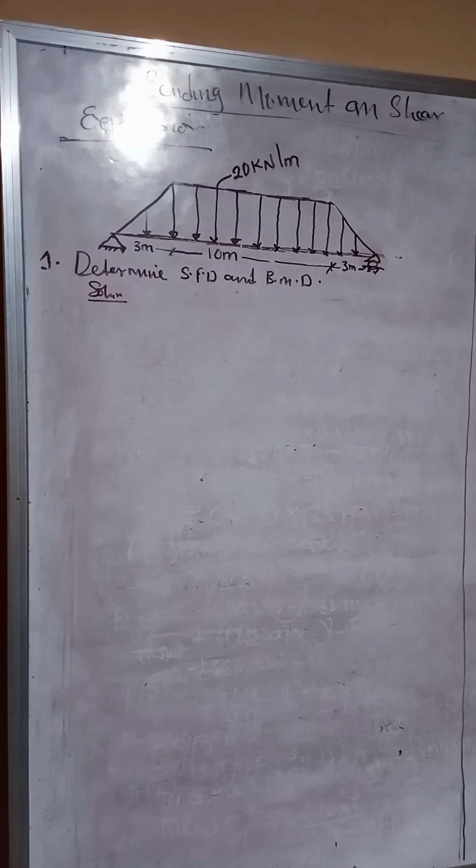The first thing we are going to do is obtain the reactions. When we draw it, we are going to have the bending moment, the free body diagram of this particular beam as this. Let's call here RA, let's call here RB.

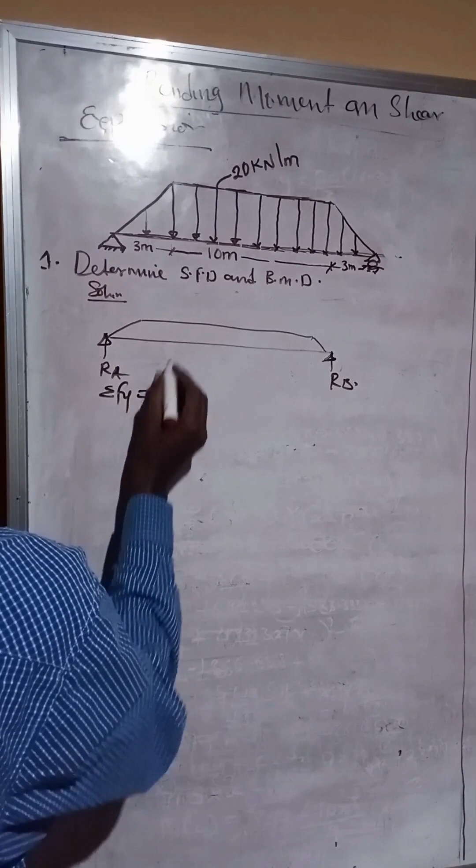Now if we calculate this, if you look at the shape, it is a trapezoidal shape. So you can say sigma Fy is equal to the area of the trapezium, and the area of the trapezium is half.

Calculate the length. Here is 10, here the entire length is 16. So it's going to be A plus B times height. A is 10, B is 16, times the height which is the intensity of the load, which is 20.

So if we do that, we're going to have that our sigma Fy is equal to... all right, so we are going to be working on this. Now if we draw this, this is the free body diagram of this expression. Here is 3, here is 3.

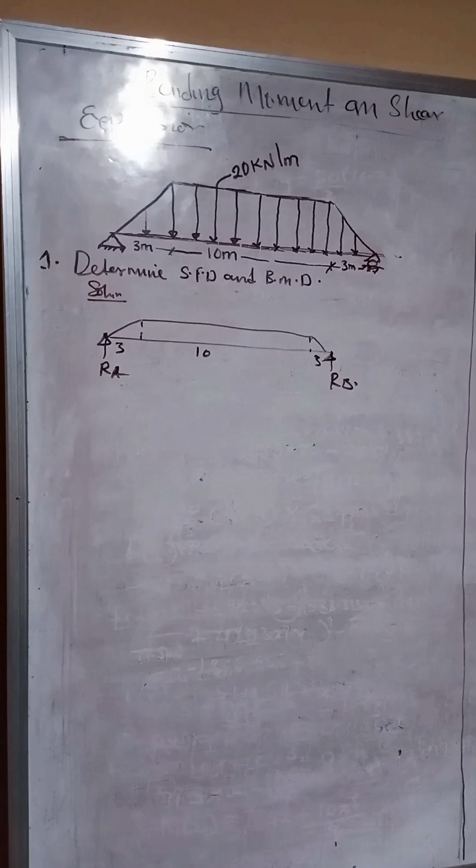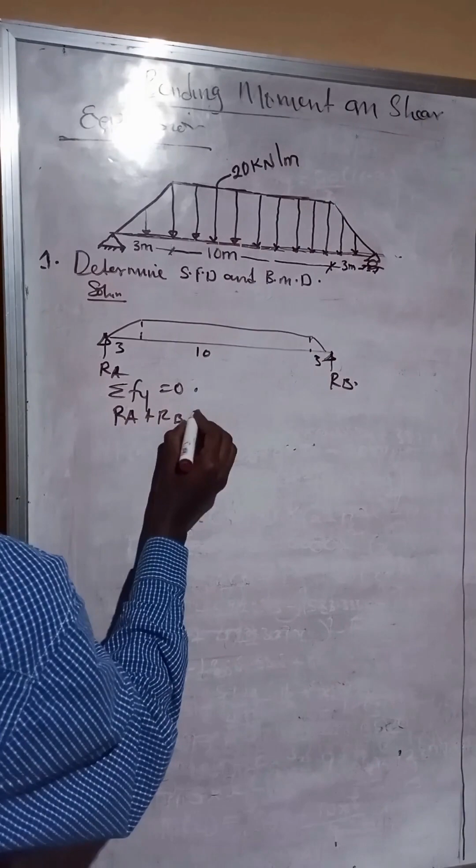This gives us 26, so this becomes 260 kilonewton. All right, so that is the total vertical reaction.

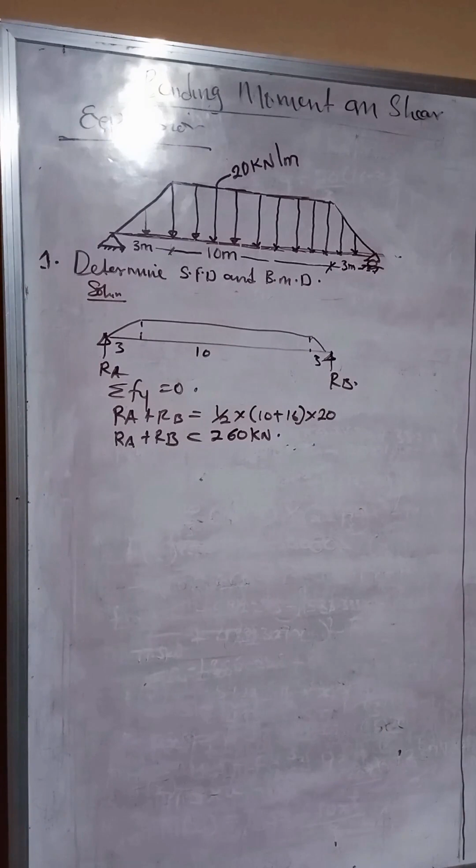Now the next thing we are going to check is looking at the beam. You can see it is symmetrically loaded on the simply supported beam, so what it means is the reactions will be the same. If we divide this beam into two equal parts, we're going to have the same reaction here and here. So Ra and Rb are going to be the same, meaning Ra is equal to Rb.

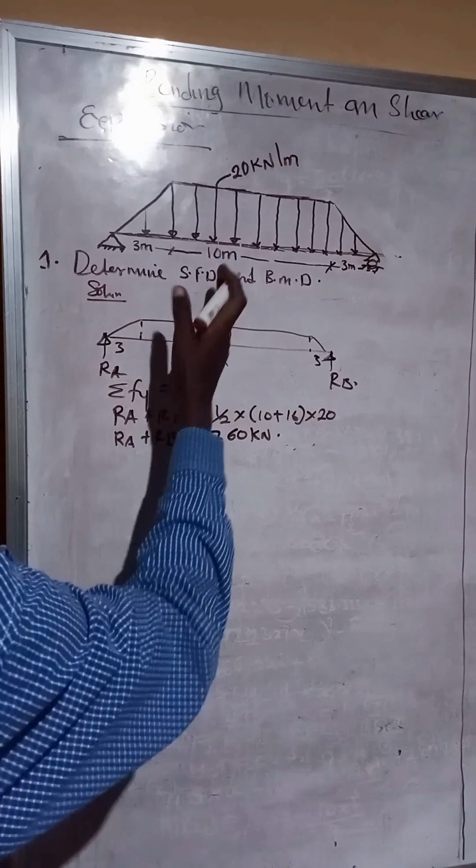So if we divide it into two, the reaction Ra and Rb will be of the same value, because of the symmetrical arrangement of the load. So we have 2 Ra, when Rb becomes Ra, becomes 260 kilonewton. All right, so we can have our Ra now to be 130 kilonewton.

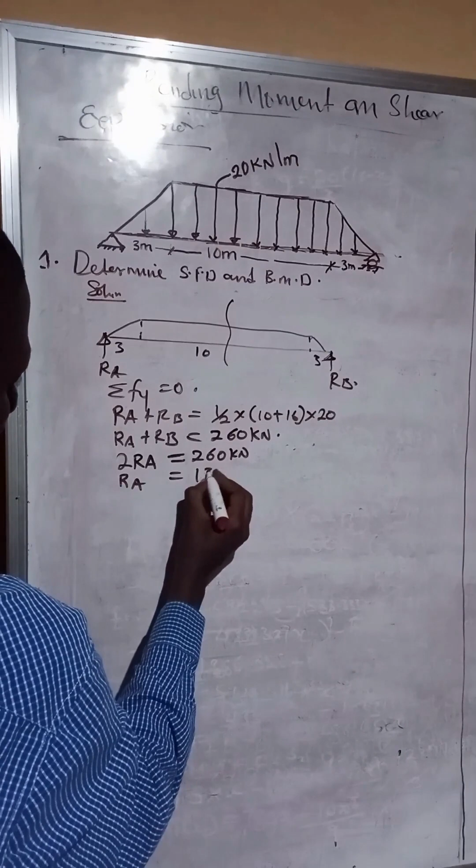Okay, so having gotten Ra, the next thing we need to do is obtain the moment expression and shear force expression for each of the load zones. Now if you look at the board, we have three basic load zones. We have the first load zone, which is a triangle, the second load zone, which is a rectangle, and the third load zone, which is a triangle also.

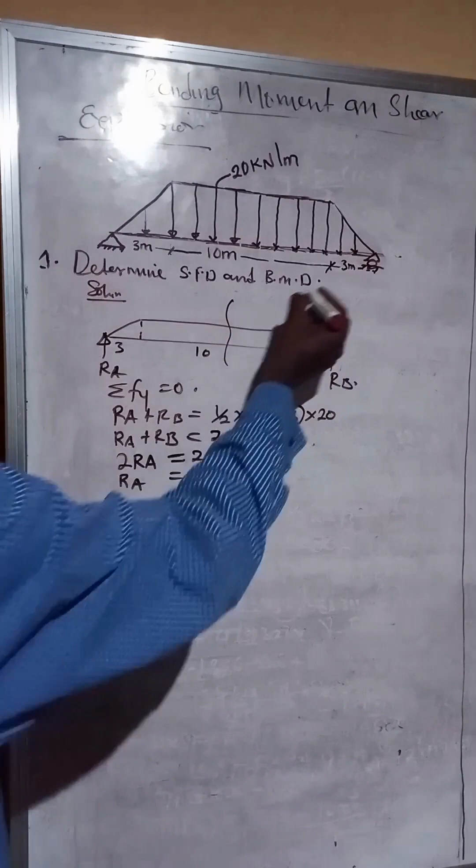So quickly, we are going to get the load zones for each of these particular loads. Now let's start by taking the first load zone. Remember, we intend to determine the shear force and bending moment diagram, and also we'll obtain the maximum bending moment for this particular beam.

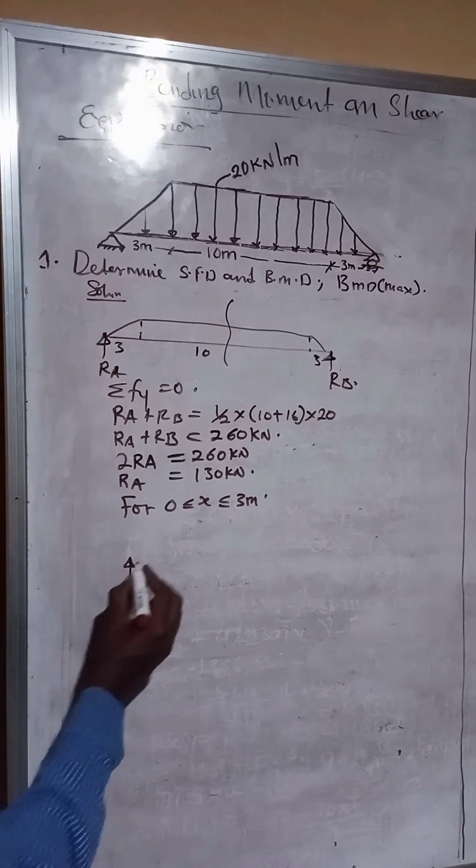Okay, so now let's start from the first load. So let's say for 0 lesser than x, and x lesser than 3, that is the first load zone we're going to consider. Now what we have as a shear force expression, remember how we used to do it? If you look at the previous videos, you have a good understanding of what we did when taking the moment expression.

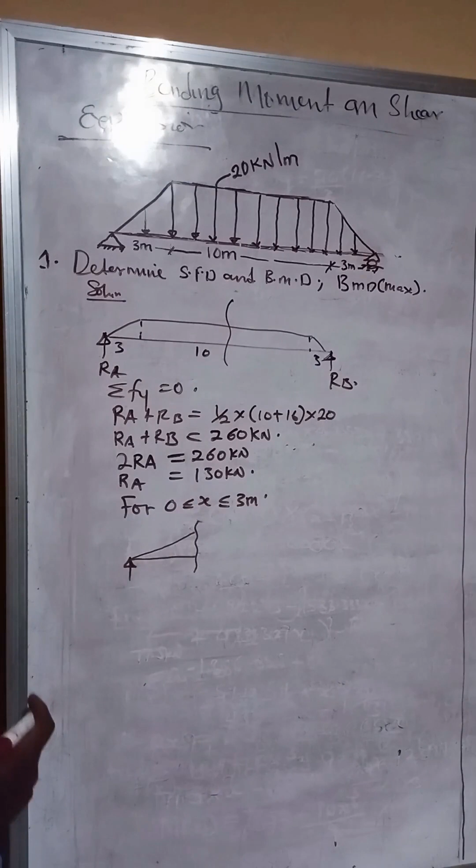Now we're cutting between this particular range. Just cut between the range. Let's call the section we are cutting 1, 1, 1. You can call it whatever you wish.

Now, when you cut through, you are going to have a vertical reaction, which is our shear, and you are going to have a moment which is anti-clockwise. That will be the internal moment, which is also a function of x. Now, this is x, value for x to this point.

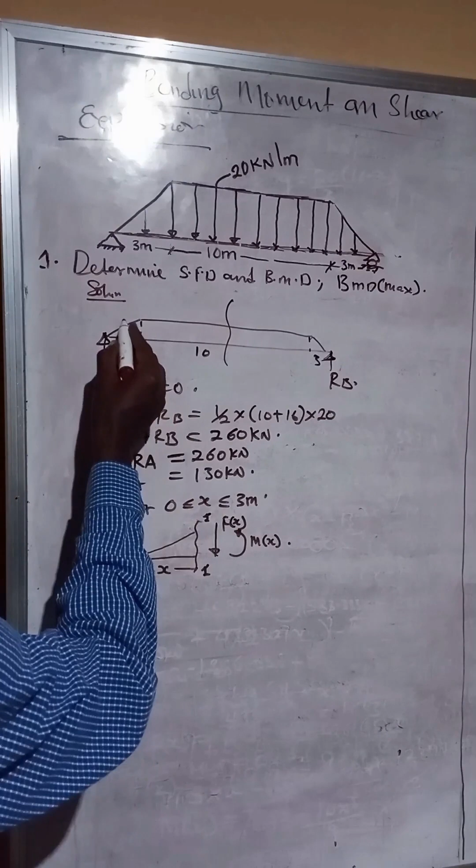So this is the first thing we are going to see. Now, apart from this, remember that we are cut between this particular load zone, and this is a triangle. Remember, when you cut between it, you are going to have... let's make a sketch of it. Let's assume we are cutting somewhere here. You have this, it goes in this direction. So if you complete it, let's assume that this is a 1, 1. So here is 20. Okay, now we've cut between it, and this is what we have.

We've already called here our x. So now we have a problem: we need to obtain the intensity at this point. If you look at it, the intensity increases as it goes to 20, so there's a particular load intensity at this point. Let's get it - we quickly use the similar triangle properties.

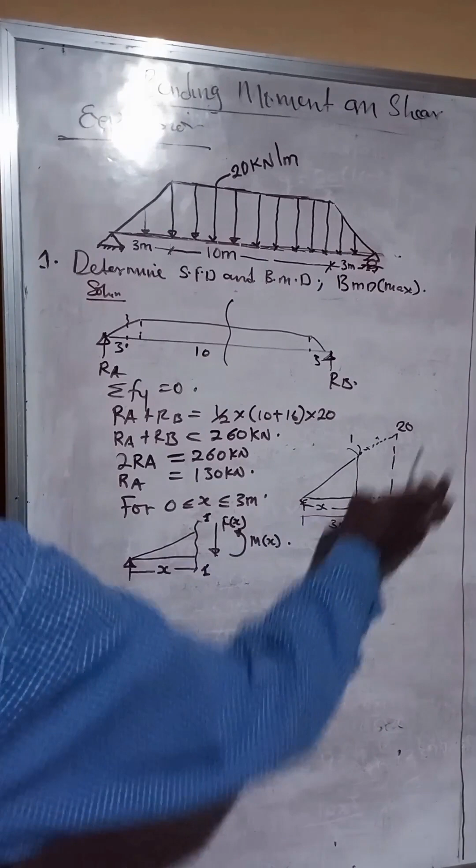Remember that the total length of this is 3 meters. So if we use similar triangles, we have triangle 1, which is this one, and the second triangle is the entire full triangle. So we're going to have: the distance here, x, over the total distance 3, equals the intensity of the small triangle, let's call it k, over the intensity of the entire big triangle. If we do that, we'll have our k become equal to 20x over 3. So k becomes 20x over 3, that is the load intensity at that point.

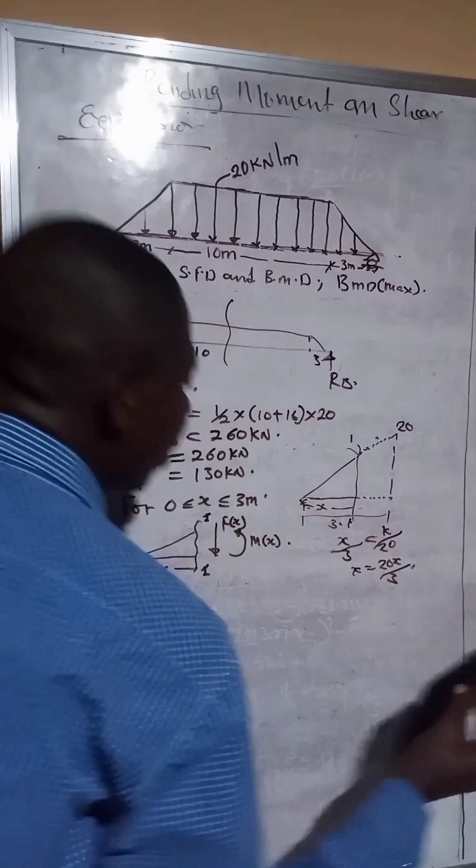So let's clean this up. We know now that here we have 20x over 3. So we have here to be 20x over 3, that is the load intensity at that point. Now remember that the support reaction we've gotten to be 130 kilonewton, so that one is here.

So quickly, let's get the shear force expression. We do the summation, the algebraic sum of forces, sigma Fy equal to 0. If we do that, we're going to have positive forces, 130 kilonewton going up, and negative forces representing the triangular load coming down. So we have shear force as 130 positive, triangular load negative. So our negative one-half the area of the load: the distance, the breadth of the triangle is x, and the height, which is intensity, now becomes 20x over 3.

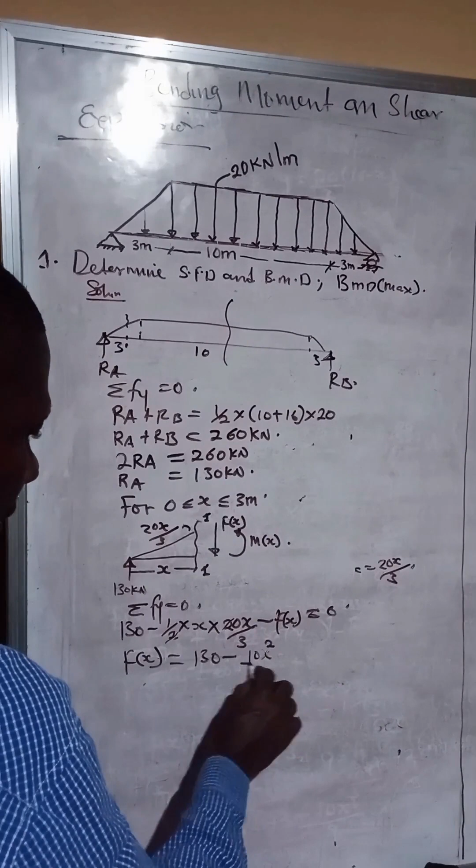Now our shear force expression, which is also negative, all equal to 0. So our shear force expression, f of x, becomes: 130 minus this - we have 10x squared over 3 (sorry, I think we just calculated the area). So we have it as 10x squared over 3. That gives us the shear force expression for this particular load zone between 0 and 3.

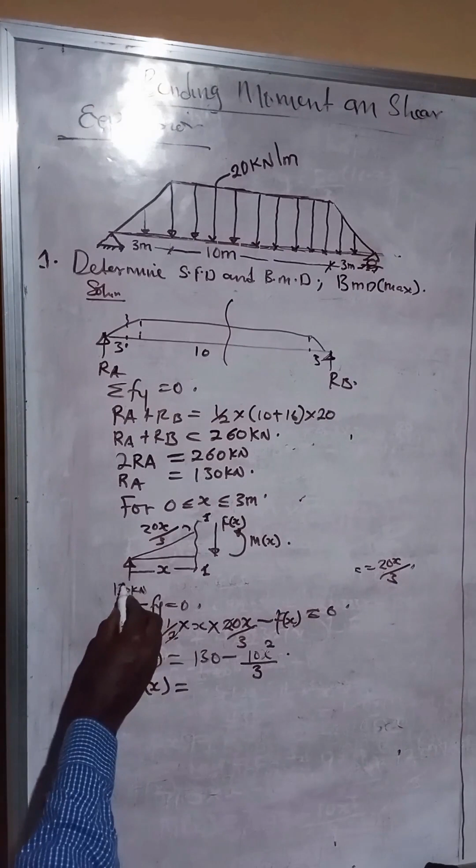So now let's get the moment expression for this load zone. We can say the moment of this particular shape is the area times the distance from the centroid to our point of interest, which is our section 1,1. So we can write the moment expression: m of x becomes equal to the distance from here to here, taking moment about section 1,1. We have from 130, we have 130x minus... okay, now let's take moment for this load.

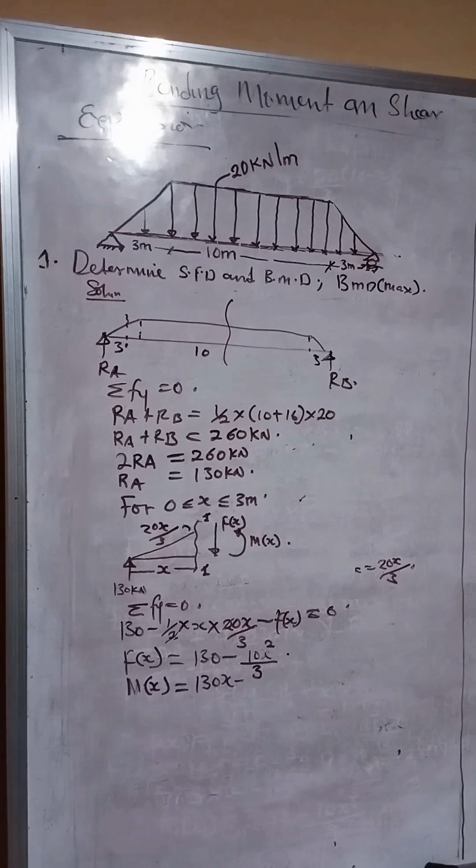Now we have this load to be what? The area of the load is this - we've got it, it's the area. So the area of this load is 10x squared over 3, we've gotten it before; remember this entity represents the area of the load. Now this area of the load times the centroid - the load is going to act as a point load acting on somewhere here. Now for a triangular load, the centroid of that load is at a point such that from this point here, we have it as 2/3 of the total length, while this point is 1/3 of the total length.

So if the triangular base is, for example, 3 meters like we have in this case, it becomes 2/3 of 3 from the center of the load down to your left hand side. 2/3 of 3 will give you 2, while the other side is 1/3 of the entire length, which is 1/3 of 3, that gives you 1. So if you add 1 plus 2, it gives you the original length of the triangle. That's how to obtain the centroid of the triangle.

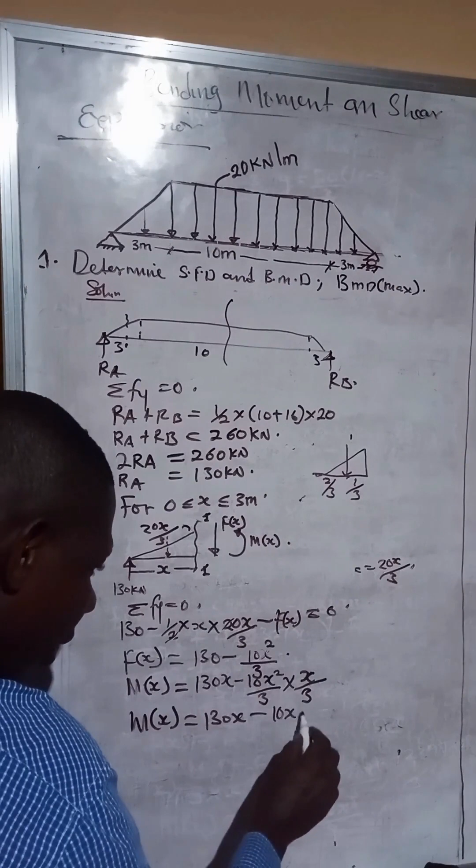So now we know that, this case becomes easier. The total load is known. Now what will be the centroid? We're interested because we're taking moment about section 1,1. So the load is acting now, we've gotten the load acting at the center. From the center to this point is 1/3 of that distance, and the distance in question is x. So we're going to have x over 3, which is 1/3 of the distance. If we take the moment expression for this point, we'll have it as 130x minus, this becomes 10x raised to power 3 over 9.

So now we've got the moment expression for this first zone and the shear force expression. Now let's go over to the second zone. If you look at the second zone, it's a rectangular load from that zone. So we're going to cut a section from there.

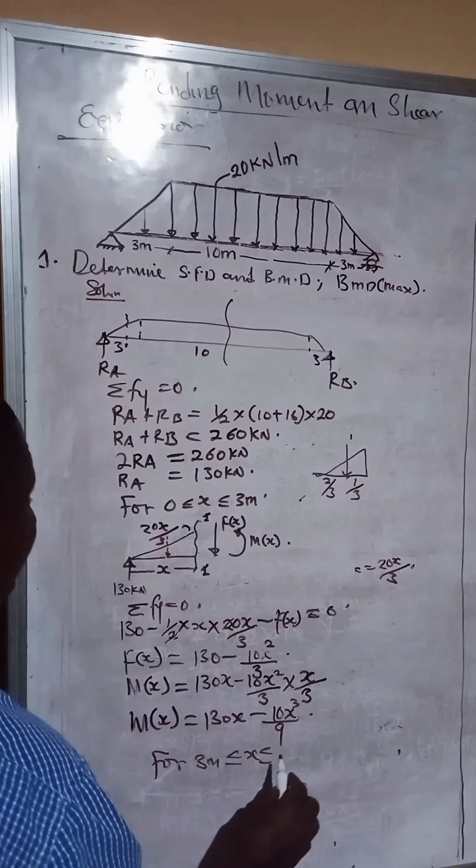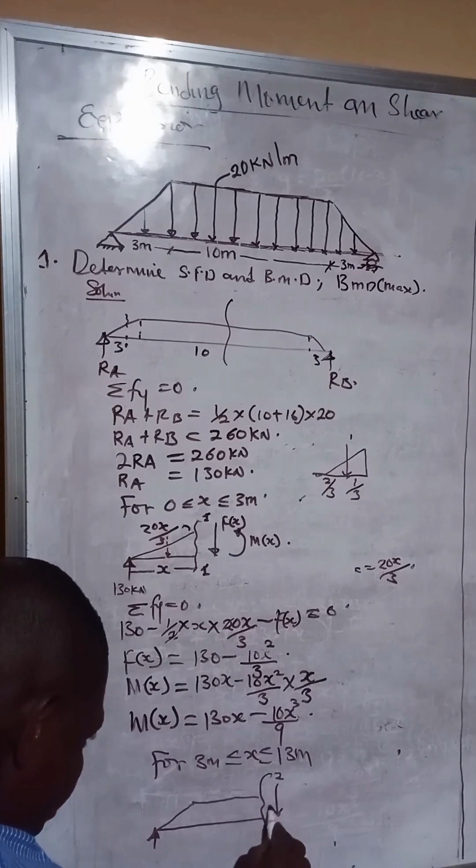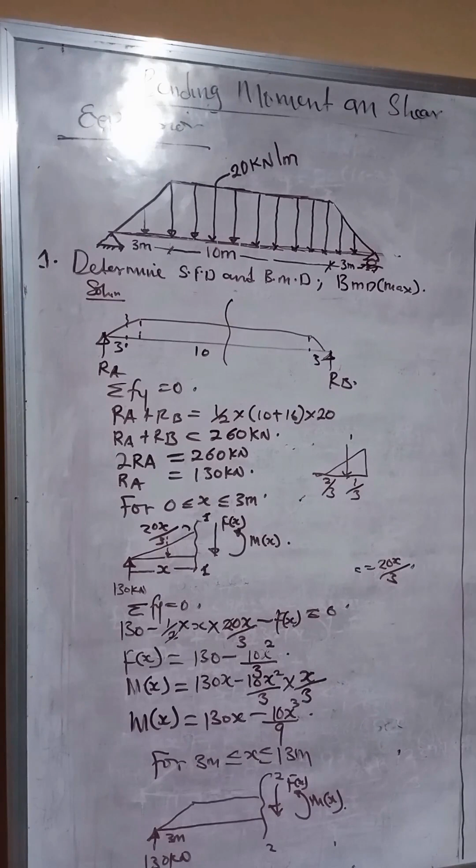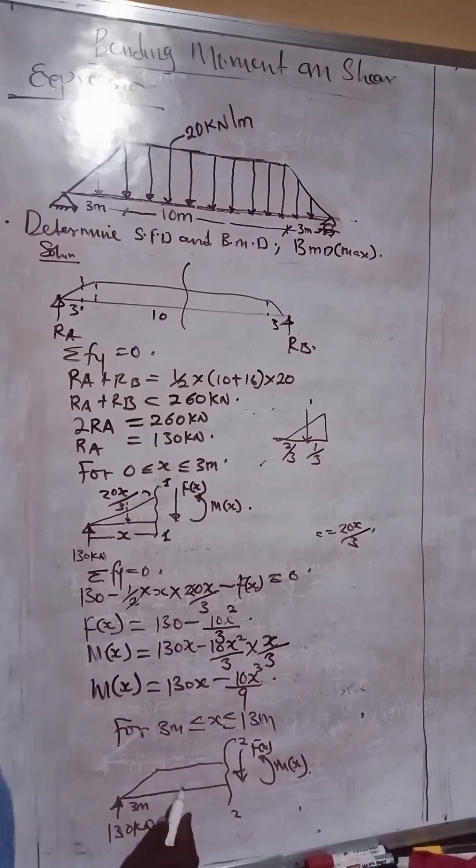Here is 130 kilonewton. Yes, 130 kilonewton, yes, 3 meters. Here remains 10 meters as usual. All right, so now let's write...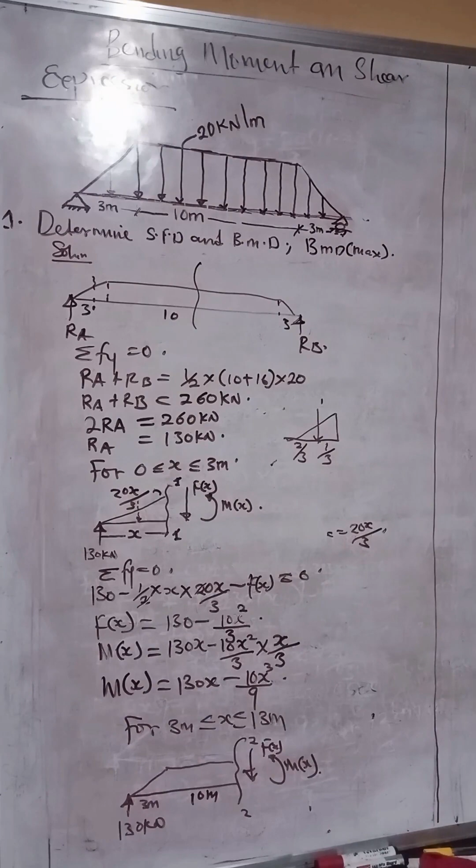Now let's write the shear force expression for this particular load zone. So if we do that for the shear force of this zone, let's redraw this so that we can have a clearer picture on this other side of the board. So this is what we are interested in, this section 2. Here is a shear force, internal shear force, and here is a bending moment. Remember that here is x down to this point, and here is 3 meters, and so on.

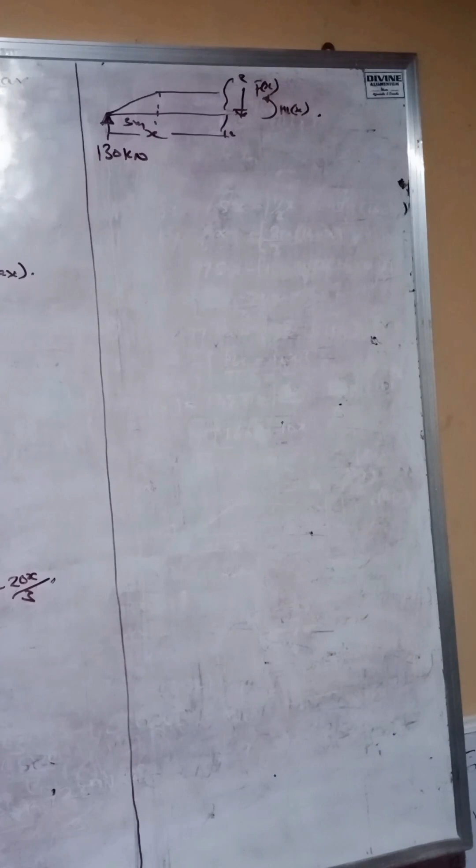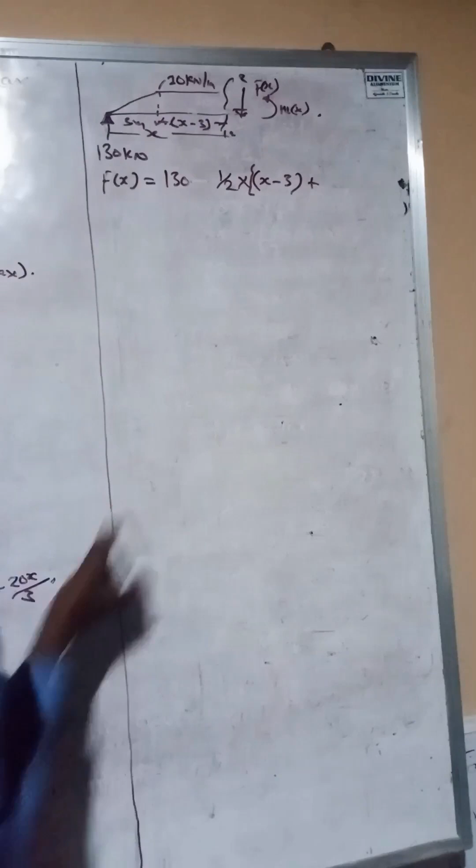We have this, this is also a trapezium. So what will be the area of this shape? Remember that area of a trapezium is half base times (a plus b) times height. These are a; our a in this point becomes x minus 3. So from this point here down to this point becomes x minus 3, let's call that point our a. So this becomes x minus 3, plus b. Our b in this case becomes the total length of this, which is x, times our height which remains 20.

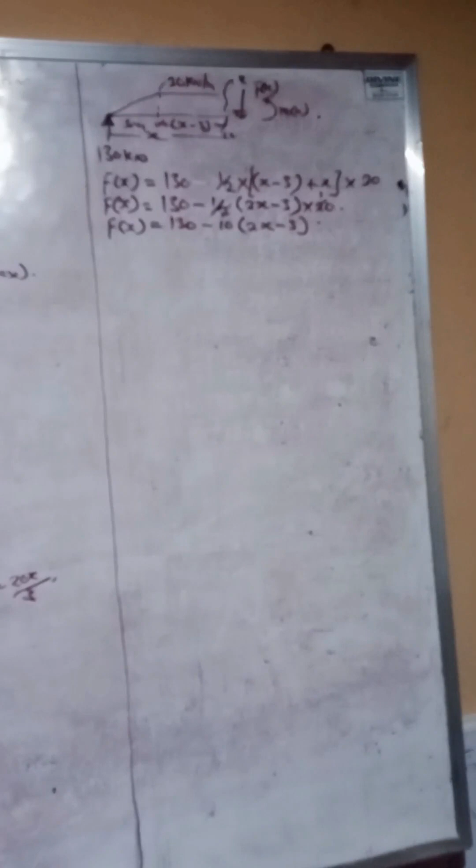So we can have our F of x as this: 130 minus. If we add up a plus b, which is this, it will give us 2x. It becomes a bracket 2x minus 3, times 20. So if we continue in that form, we'll have F of x equal to 130, minus 10 bracket 2x minus 3. So that's what we have as the shear force expression for this particular case. You can see we've been able to use the area of the trapezium to obtain that.

Now what will be the moment expression? Similarly, we'll have the moment expression as M of x equal to 130 times x. Now, 130 times the moment about section 2. Here, let's calculate the load.

Now, what we should have done, or what we can do, is to obtain the centroid of this trapezium, so that by the time we calculate the load, it's going to be the load times the centroidal distance to section 2. But let's see whichever one will be easier. Alternatively, we can decide to obtain it individually.

We can take the load of this triangle, multiply it about the centroidal distance to section 2, or we can take the load from this point and multiply it to section 2. So we're going to have 2 loads that we're going to use, meaning we're going to have 2 sections. Okay, so let's do it this way.

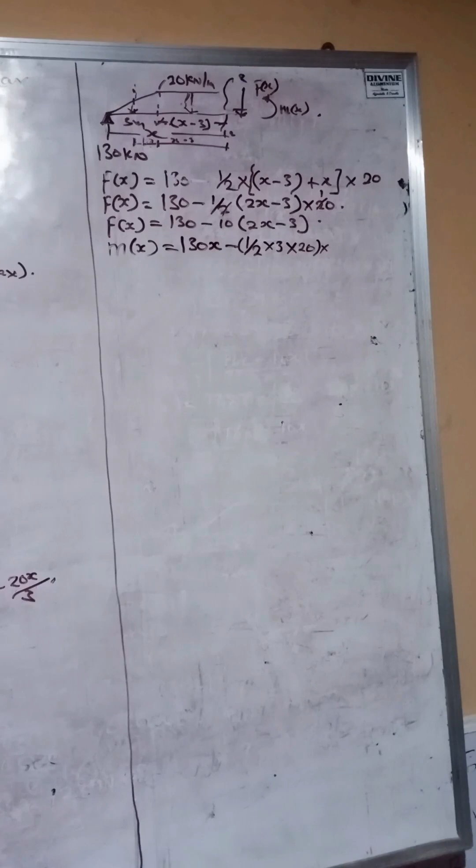So from here down this point is 1/3 of 3, which is 1. So here is 1 meter. And from here now we have x minus 3. So if we do that, we're going to have 1 plus x minus 3 as the centroidal distance of that load. So 1 plus x minus 3 will give us x minus 2. Okay, that's the first one.

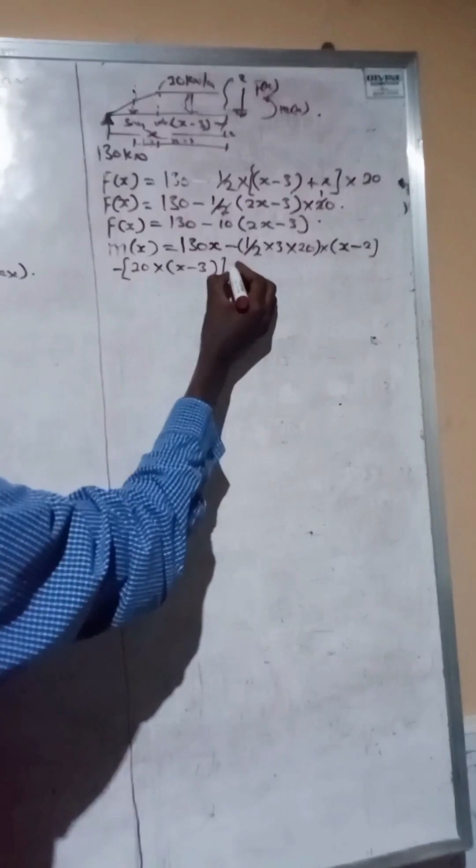Then for the rectangular shape, we'll have the load here as 20. So we'll have 20 times the distance, which is x minus 3. So once we do that, this becomes a load. Now, what is the centroid of this load to this point? It's just x minus 3 divided by 2.

So to write the moment expression here, we'll have M of x equal to 130x minus this 10, which is 30. So it becomes 30 bracket x minus 2. While this point, if we open the brackets, this cancels and becomes 10. So we have 10 bracket x minus 3 all squared. All right, so this is what we have as the moment expression for this particular beam for this zone.

Now the next of them, we are going to take the second load zone, and the second load zone is for 13 meters to 16 meters. That is the second load zone.

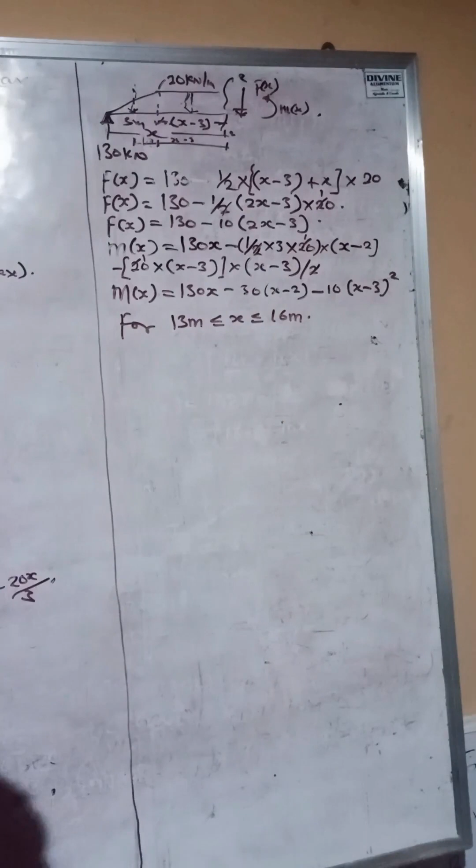Now, if we do that, we are going to have it as, let's draw the free body diagram. So let's assume this is where it is. All right, so this is how we're going to have it.

Remember that here remains 20 kilonewton per meter. Here's 3 meters. Here's 10 meters. And here is unknown. So let's call here, we'll have our 130. So the value for x here, x comes this way. Now let's call this section 3-3.

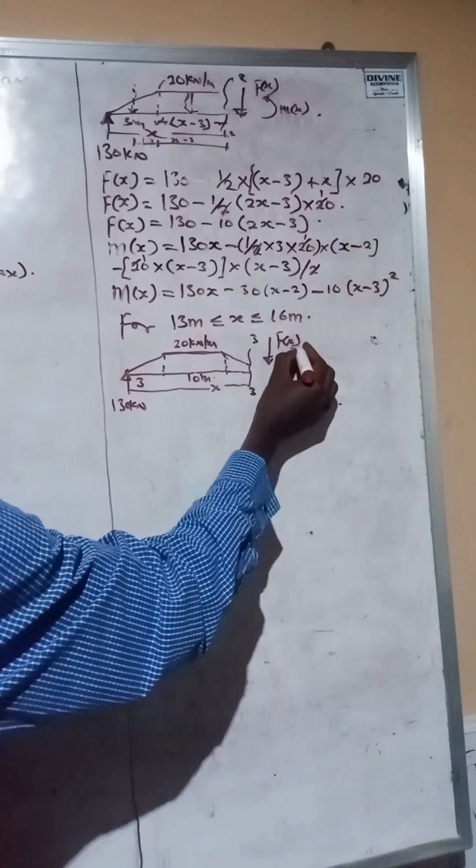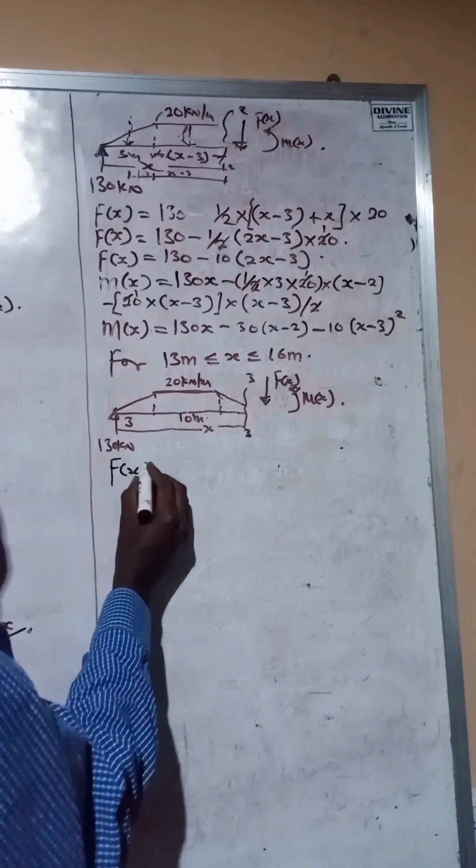Section 3-3, we have the shear force expression. We only have a problem with this particular triangle. Let's take the shear force expression. We have it as F of x equal to 130.

So we have 130 minus, let's take this load: 1/2 times 3 times 20, that is the load, minus, we have this point to be 20 times 10, that is the load. Now these other points, these are a triangle, minus this triangle, remember,

is having the shape of a trapezium. All right, there are two ways we can handle this. But before we do anything on this particular portion, let's take out the portion out of the system so that we can see it clearly. Let's take out the portion so you can see it clearly. This is what we're interested in.

All right, so there's the portion. Remember that here is 20 kilonewton per meter. Now let's divide this section into two portions. Let's call this 1, let's call this 2.

Now if you look at portion 1, it's a triangle. Portion 2 is a rectangle. Now we need to get the area of this and this.

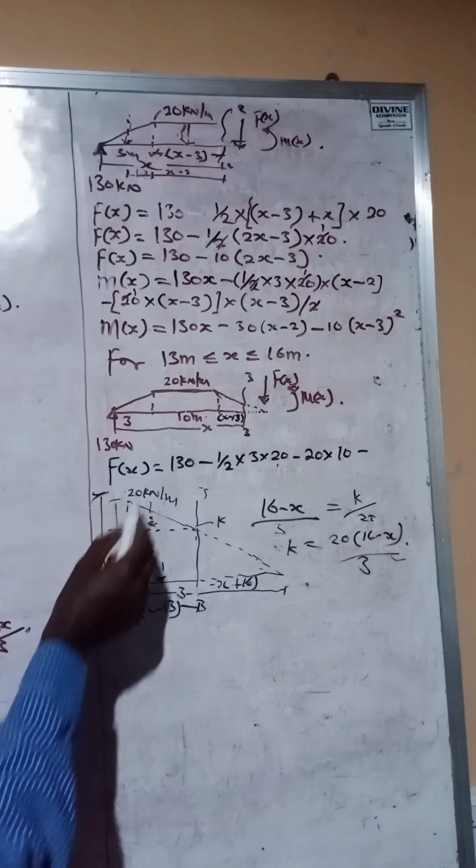So for us to get the real height of this portion of the triangle, remember that the total intensity here is 20. We've gotten that of this portion 2. So for us to get the remaining portion 1, the intensity of portion 1 separately becomes the total intensity of the full triangle minus the intensity at this point k. So it becomes 20 minus k.

So if we do 20 minus k, it becomes 20 minus 20 bracket 16 minus x over 3. So this is what we have for it, and we can decide to solve it so that we can obtain a value for it.

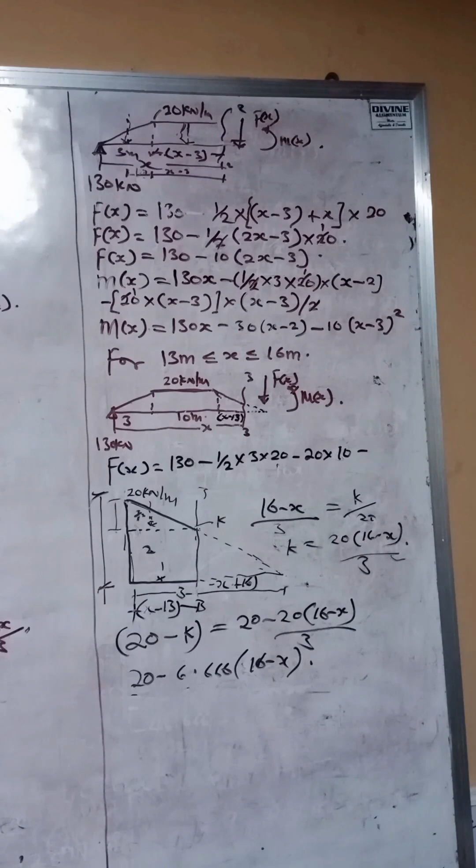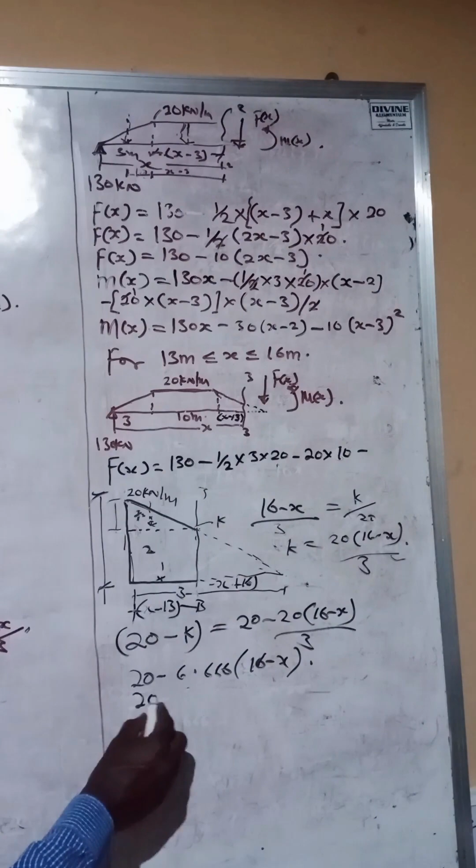So now let's look at what we've gotten. For minus 20, from 20 we'll minus this. If we multiply this, we're going to have 20 minus... All right, so this portion which is here, we have it as this particular triangle.

Have it this way, is a triangle. The intensity here becomes 20 minus k, while we have this portion, which is a portion of the rectangle, to be k. So these are the 2 points we have in this particular shape. Remember, each of them has their centroid, their length, their base to be x minus 13, x minus 13.

So we are going to pick it from there, look for the value for k here. The value for k here becomes... this becomes k becomes 6.666. 16 minus x. That is our k there.

16 minus x. Y here becomes 20 minus our k, which is minus 106.6656.

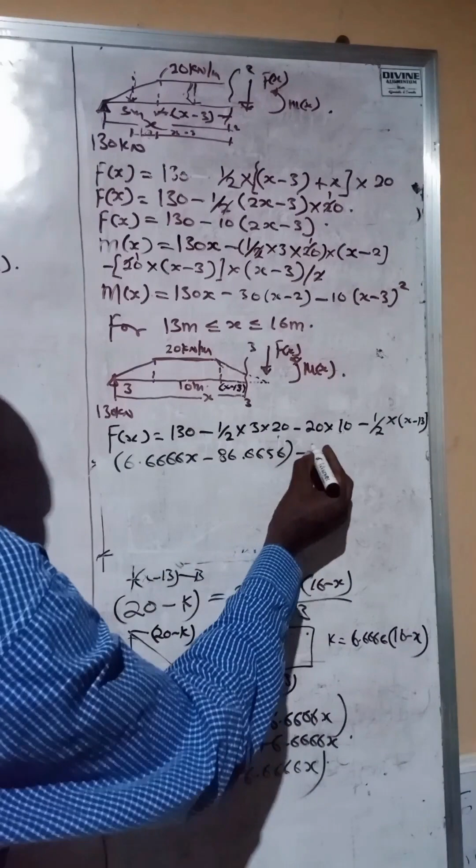So intensity becomes K, and that value for K is 106. It becomes 106.666 minus 6.666x. That is intensity times the area, the distance covered by that load is x minus 13. This gives us the shear force expression for this particular load zone.

So if we want to simplify it further, we'll just go and expand it. Okay, so x becomes, let's work out this here, we have 1, so this becomes 30, so it becomes 130 minus 30. If we work out the x minus 13 bracket, this gives us 3.3333x minus 43.332.

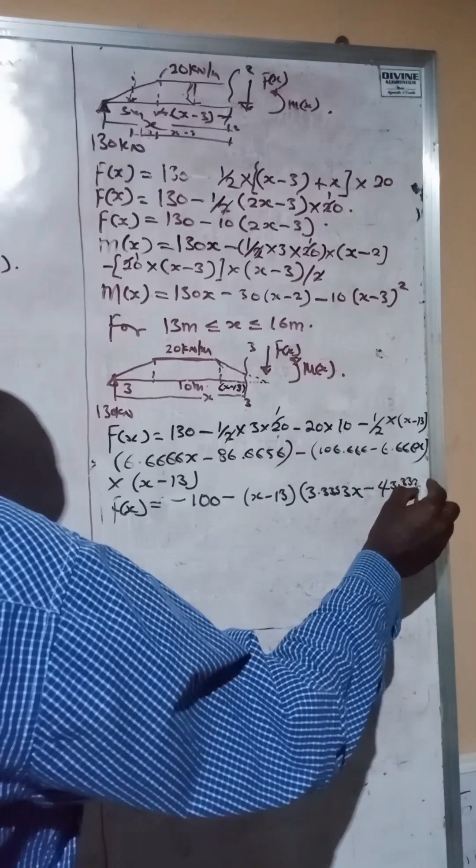Okay, so let's continue to simplify it. Then on this other side we have minus, minus 100, minus 106.666 minus 6.6666x, because this is x, and here we have x minus 13.

So this gives us the expression for the shear force if you wish to expand it, but looking at what we have, there is no need because that appears to be the last zone of this particular problem. Expanding it will be of no significance. We can plug in values of x from 13 to 16 into this expression and get whatever shear force we intend to get along this line. So we can leave it this way.

Now let's move over to the next one within this load zone, which is the moment expression. We'll start with this zone. Remember taking the moment about this point, we take a moment about this point. This becomes...

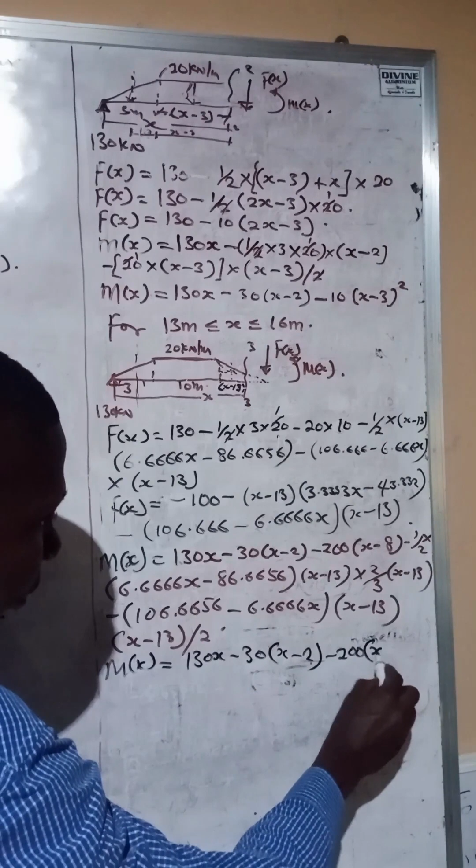Now, the next thing we are going to obtain is the moment. Let's rewrite this expression and make it simpler. We'll have m of x equal to 130x minus 30, x minus 2, we have 200x minus 8. So we have this.

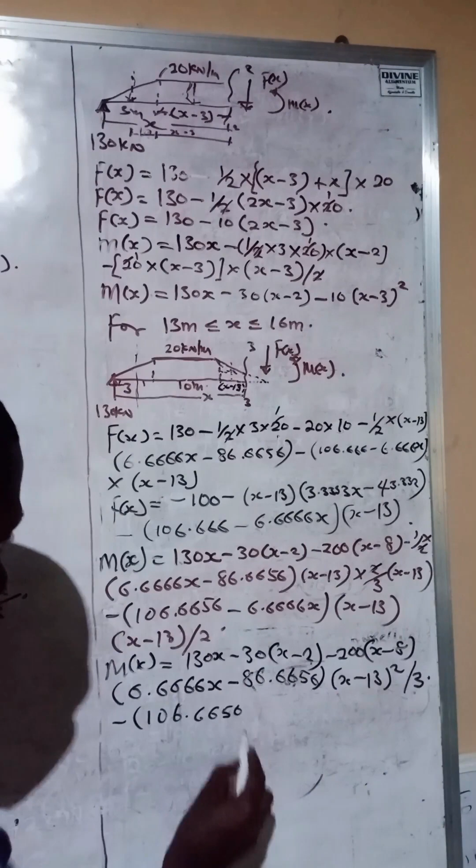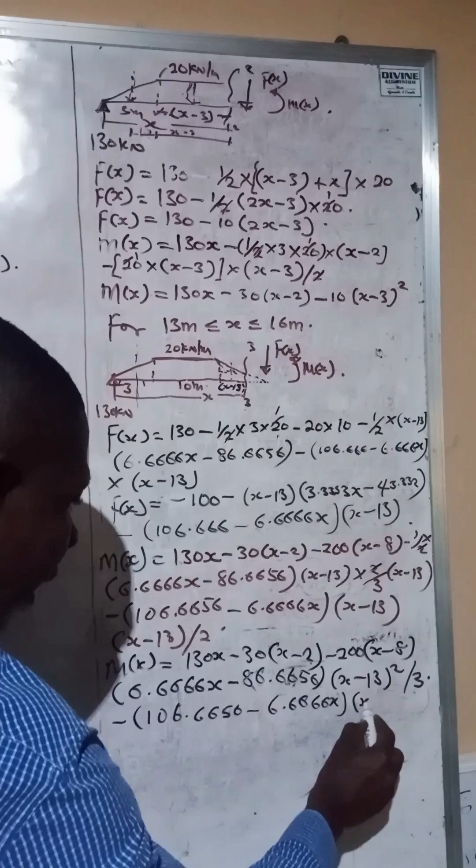Now take note, we cancel this. So we'll have here to be... all right, so we have two of these. So we have x minus 13 squared all over 3. So, bracket x minus 13 squared over 2.

This becomes the expression for moment for this section. Like I said, we may not need to begin to calculate - all we need to do is plug in values into it and get the moment along that particular range.

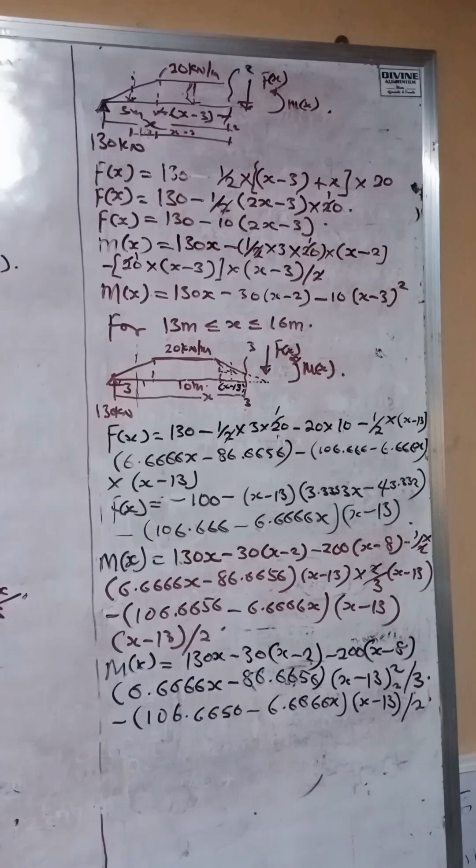Now, in determining the maximum moment, which of these zones is going to produce the maximum moment? If you look at the board and look at the beams, by symmetry, it's most likely to occur at the zone between 3 to 13. That is where the maximum moment will occur, and this maximum moment will occur at a point where shear force is 0. So for us to obtain the maximum moment, if we don't want to use symmetry, all we need to do is identify the load zone that is likely to produce the maximum moment by looking at the load configuration. Remember that this load has varying load intensity.

So if you want to do that, you can say f of x between load zone 3 to 13, let it be 0, and look for x. When you look for x, you will know the point along x where we will have the maximum moment. So the maximum moment will occur at that zone between 3 meters to 13 meters. But if you want to, you can try it out to see and look for x at that zone. Equate f of x to be 0. Once you do that, you have the value for x that will produce the moment. So substitute that value into the moment expression for that particular load zone, which is load zone 3 to 13, and you will have the value for the maximum moment.

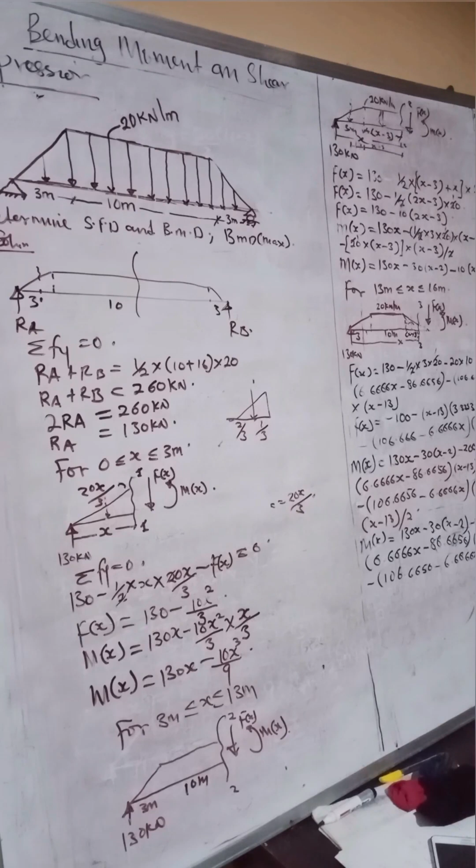Now, the same thing goes with the last zone. We also produce a curve that is of the same equation as that of the first load zone. So take note while drawing the curve.

Now, if you look at it, the maximum moment will occur at the center of this beam because it's symmetric - a symmetric load. So if we divide it into 2, the maximum moment will occur at the point 8 meters away from the left hand support or the right hand support, whichever direction you are picking it from.

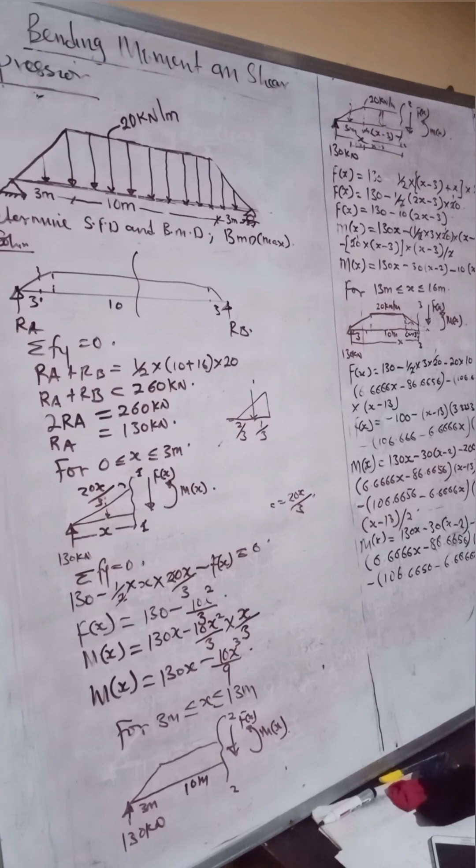So that maximum moment will give us the value for x at that point as 8 meters. If you want to try it, you can substitute it into the moment expression we have in load zone 3, and you'll have the maximum moment. So let's get that value and draw the bending moment diagram and shear force diagram.

Also take note that for load zone 0 to 3, since the bending moment diagram for that zone will be a cubic parabola, the shear force for that point will be quadratic - it's going to carry a normal parabolic curve, not cubic parabola this time. And the same thing happens to load zone 13 to load zone 16.

So the same thing will happen. So when drawing the diagram, take note of this particular point: between point 3 to 13, the shear force diagram will be a straight line, running straight from x equal to 3 meters to x equal to 13 meters. So that is how I go.

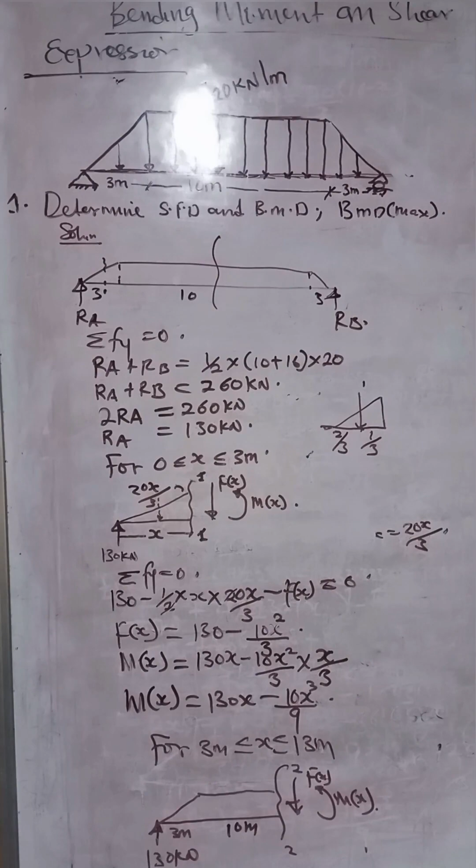So let's draw this. But first of all, let's obtain the maximum moment. All right, so let's obtain the maximum moment.

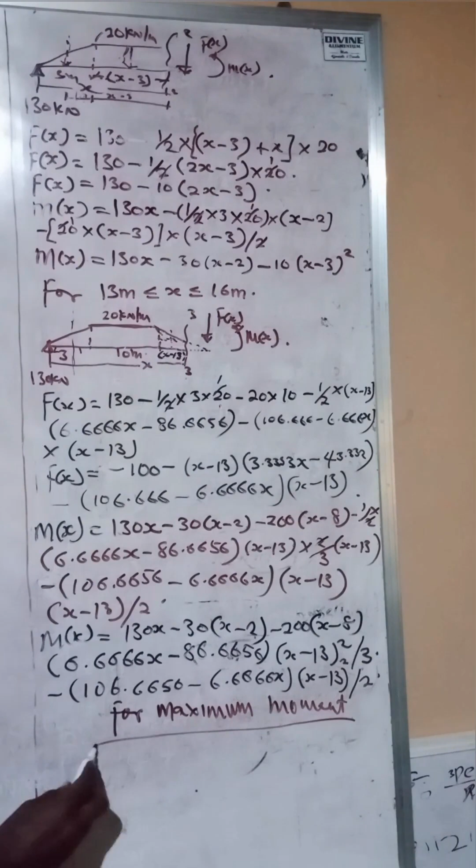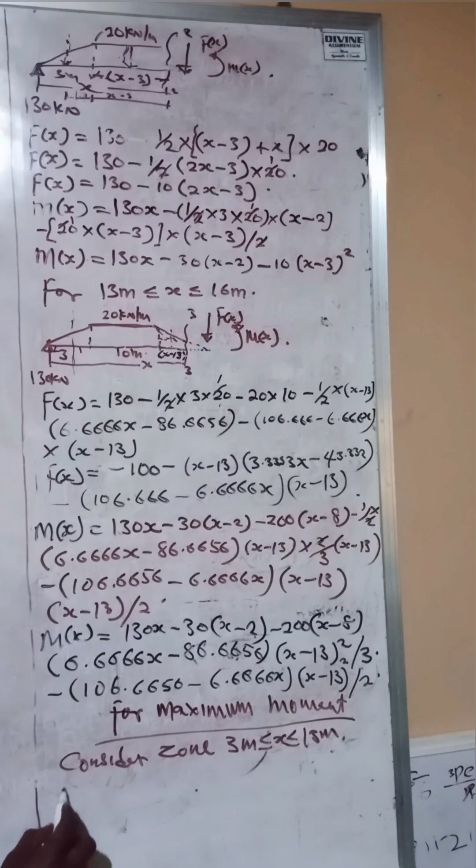If you come to that, look at it here, this is the expression: 130 minus 10 bracket 2x minus 3 equal to 0. So if we solve this mathematically, we'll have that x is equal to 8.

So x is equal to 8 meters. All right, so that is all we have for x equal to 8 meters. Now what will be the maximum moment?

The maximum moment expression - we put x into this expression to obtain the maximum moment. So if we put x into this expression, we will have 8. Let's do that and see. This is the expression, if here is 8, if here is 8, let's see what we have.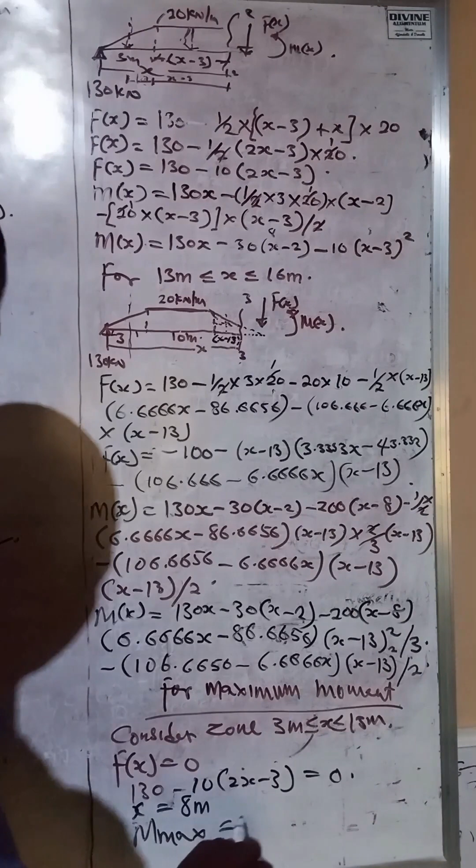So if we plug in 8, we have that the maximum moment, M maximum, becomes 130 times 8 minus 30 times 6 minus 10 times 5 squared. So eventually we'll have everything to be 610 kilonewton meter. So this 610 gives us the maximum moment for this particular beam.